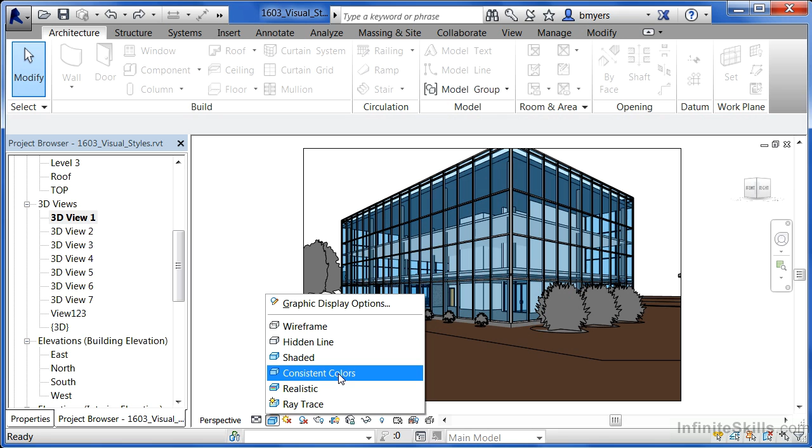When you do, you'll see that there are really 6 different main visual styles. One is called Wireframe, and then it progresses on through Hidden Line, Shaded, Consistent Colors, Realistic, and Ray Trace.

Wireframe is one of the least used ones, but it does have its place. Wireframe does 2 things very well. First, it allows you to select objects that otherwise might be difficult to get to. So if you needed to grab onto a ceiling or a roof, objects that otherwise might be obscured by the lines that make up walls or other kinds of objects, turning wireframe on means you can reach up and highlight that roof object, which otherwise may have been nearly impossible to grab because it would have tried to select the wall instead.

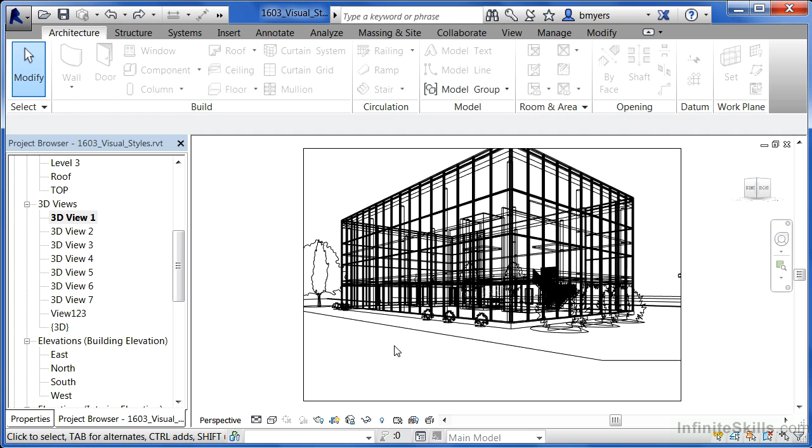Another good feature about wireframe is it's the fastest mode for Revit to process. If you have a very large model and you're trying to spin it around and see it from a certain direction, but the model is very slow in its processing, which happens from time to time, turn on wireframe and it'll tend to be much faster.

If we click down here again, it changes to hidden line. Almost all of your construction documents are going to be done in hidden line mode.

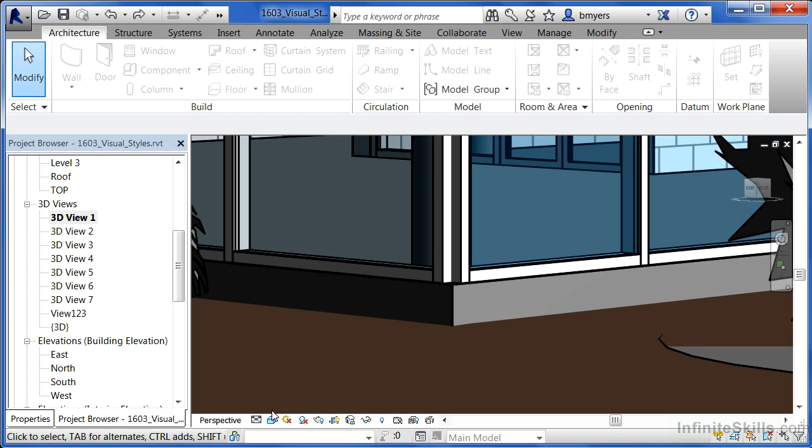Shaded will just add different shade to this. We can see that it's light here, but there's shade applied here, and there's shadows on the floor inside of the building. Consistent Colors is a lot like shaded, except it gets rid of the shade. Essentially, it keeps the colors intact, but removes that shade so everything is the exact same tone if it's the same material.

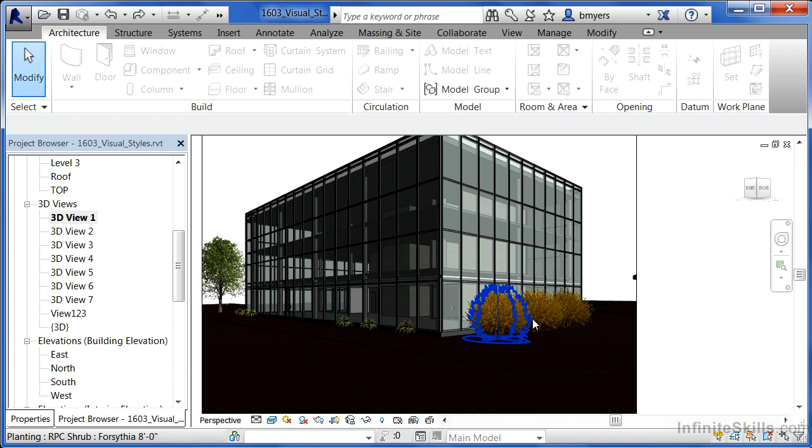The next one is Realistic. This is a very good example of where it looks pretty realistic. Other times it doesn't look very realistic at all. But what realistic mode will do is if there's brick or block, it'll show it as being that kind of brick or block. If it's glass material, you'll be able to tell it's glass material. And of course, if it's plants like we see here, we'll finally be able to tell what that plant is going to look like when it comes time to render it.

Now, ray trace mode is by far the slowest mode. And if you have a slow computer, you can expect ray trace mode to take a good long time to process. As we're looking at this regenerate on the screen, we're starting to see certain dots begin to go away. Ray trace will continue to look better and better the longer you let it sit there and wait.

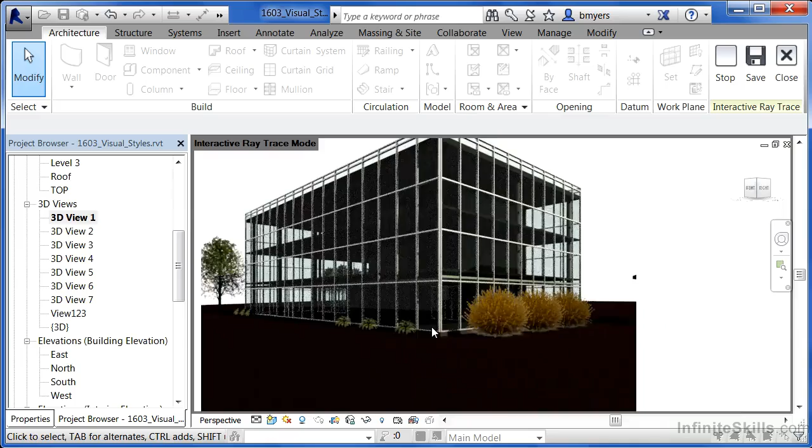Ray trace is doing a rendering on the fly on the screen. In fact, it's even possible to zoom in and zoom out while you're in ray trace mode. The only problem is that it takes Revit a long time to process that. So unless you have just a blazing computer, it probably won't be able to keep up. So I usually recommend not using it. But as we can see, it gives you a pretty good visual. And if I'd let this wait for 2 or 3 minutes, it would look like a rendering whenever it was done.

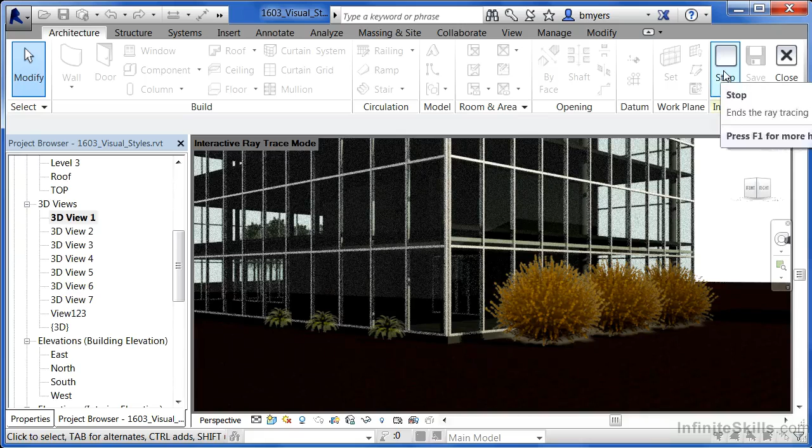To get out of ray trace mode, select the stop button and then click on close. It'll take you out of ray trace mode and drop you back into whatever the previous mode was that you were in before.

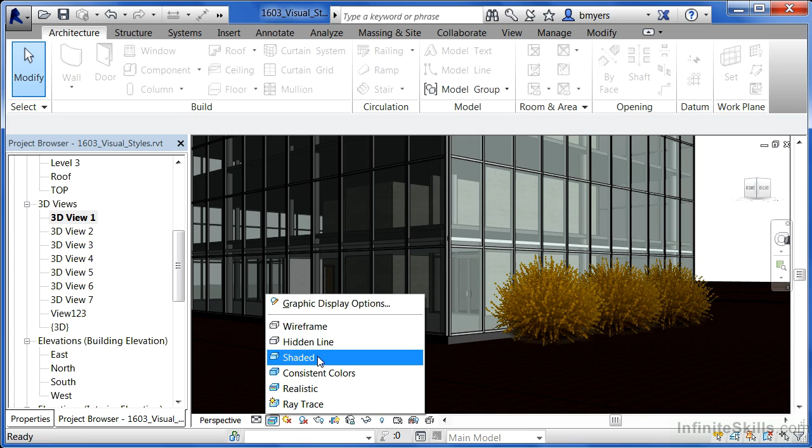So your visual styles allow you to see your model, whether it's in a 3D view or a plan view, in a variety of different ways. The 2 that you're going to use the most often will be hidden line, because that's where you're going to do your construction documentation, and shaded, because it shows all your different components, such as block wall and the glass that makes up these curtain walls, with the general color and appearance without taking a very long time to process that information.